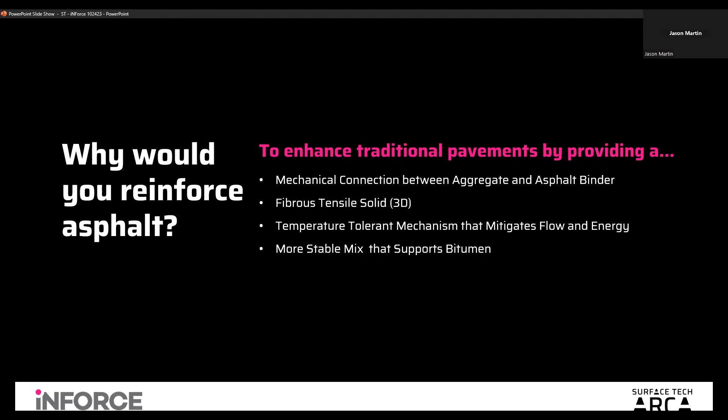Good morning, good afternoon in the US. I guess it's tomorrow where you all are at, which is kind of a cool thing. Every time we speak to folks in New Zealand and Australia, it's like looking forward in time, which is pretty cool.

So we're going to talk about ACE XP Aramid fiber solutions, but we're going to start off by looking at what typical pavements look like as they age and as they get beat up over time.

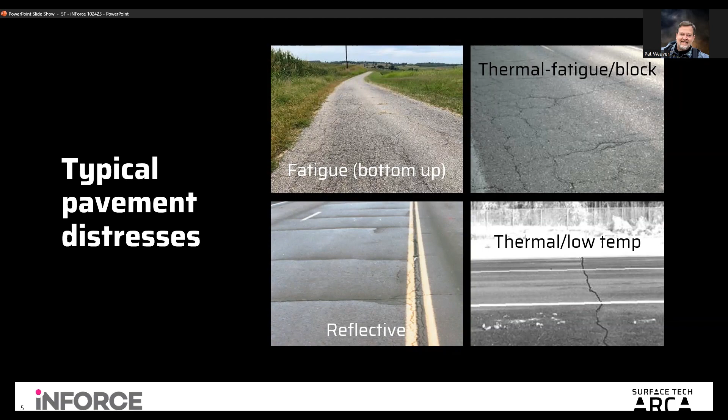I'm in the Phoenix, Arizona area, and those things tend to go hand in hand here, where once in a while it does rain and it does a tremendous amount of damage to the surface, which results in raveling and so on. So these are a lot of the different typical pavement distresses, and I trust they're similar to what you all experience in Australia and New Zealand.

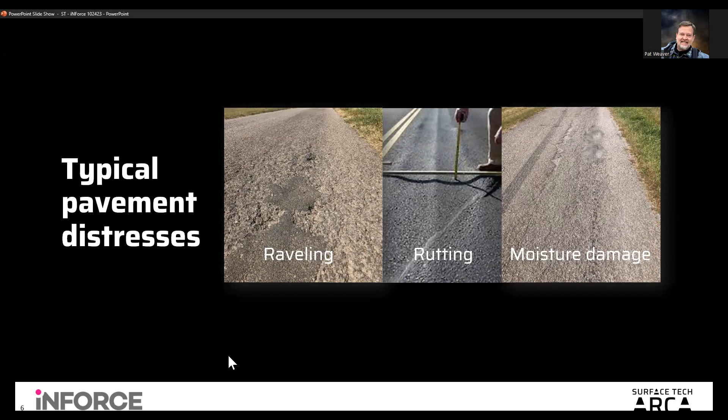Okay, so yeah, we all experience this all over the country. This is what happens with asphalt: asphalt ages, asphalt breaks apart, and asphalt falls apart. However, it doesn't have to deteriorate as readily or as quickly as we've seen in most of our lives. So what can we do to help with that? Well, first of all, we're going to talk a little bit about what makes up our product, and that's Aramid.

So what is Aramid? Aramid fibers, that's short for aromatic polyamide fibers. It's a class of high performance synthetic fibers known for amazing strength, exceptional heat resistance, lightweight properties, and many other aspects.

Aramid itself has a melting point over 425 degrees C. It's 5 times the strength of steel, which is quite amazing when we show you some pictures in a few slides of what our fiber looks like when you pull it apart and look at the individual strands. Each strand has a 400,000 psi tensile strength. Quite amazing product, high modulus.

Here's the big thing with Aramid fiber that's so different than other fibers. Most other materials you put in asphalt in fiber form will absorb asphalt cement. In fact, that's what cellulose fiber and mineral fiber are made for. Aramid fiber is not made for that. It does not absorb asphalt cement. It likes asphalt cement, we're going to show you a couple slides in a minute that'll show you that, but it loves the connection without absorbing.

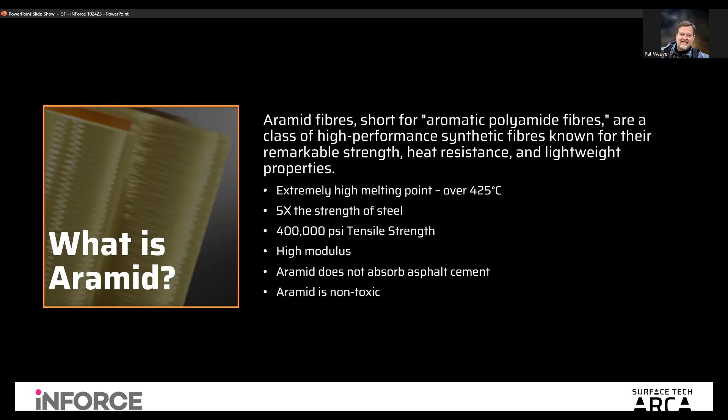So Aramid in use. In 1971, DuPont commercially started producing the first generation of Aramid fibers under the brand name Kevlar. Kevlar is a para-aramid fiber. I mean, the molecules are highly oriented along the fiber axis, which gives it outstanding strength and rigidity. We all know, have heard of Kevlar and what it's used for: body armor, aerospace components, ropes, protective gear.

Obviously, there's no issues with touching this fiber because we make clothing out of it. We make protective clothing out of it. We also make what used to be steel belted radial tires, or the material inside aerospace, airplane tires. It's all done with Aramid fiber now.

It's pretty amazing. Another application is a product called Nomex. It's a meta-aramid fiber, slightly different, excellent flame and heat resistance. So a lot of insulated gloves that you might wear for welding or handling super hot materials are made from Nomex, as well as the baghouse bags in every asphalt plant that uses baghouses on the planet, made from Nomex, which is a meta-aramid. Slightly different, but still an aramid fiber.

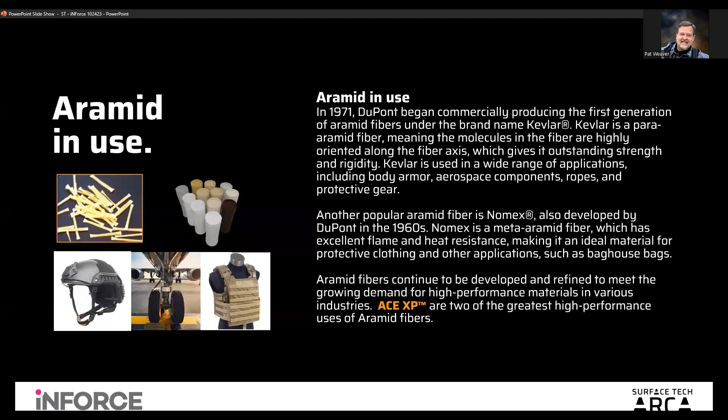And lastly, we continue to find different fantastic uses for aramid fiber, and we think we've found one of the best in our ACE XP. So how does it work? How do aramid fibers themselves work in asphalt? Well, the aramid fiber creates a three-dimensional reinforced composite material. We call that composite material ARCA, and I'll talk about that in just a minute. ARCA stands for Aramid Reinforced Composite Asphalt.

When you take the loose fiber and it gets mixed into the mix, under a magnifying glass or a microscope you can see what it looks like. Very much you can see the hair-like fibers with the little barbs on it. Well, those barbs love asphalt, and it allows it to root into the binder. Those fibers also love the surface of the aggregates. It bonds to the granules of the aggregate as well as the surface of the aggregate, and that's very, very important in the functionality of how this comes together. So combined, rock and sand or aggregate, bitumen, and aramid fibers create what we call ARCA.

George, do we want to pause here for a second for any questions? I see a couple on the Q&A or chat. Yep, good. That's good. Pat, we've got a good question here.

It's to do with RAP. So the question was asked, using product in upper layers, which may be recycled for RAP, does this put the RAP into the contaminated RAP category and hence unsuitable for reuse? That's a really, really good question, because many times when you use like a fabric material, and you mill that up into the RAP, it makes it very problematic to use. Our product doesn't. Our product loves to be reused over and over. It's such a fine product that as it goes through the milling cycle and the crushing cycle, you actually gain benefit in the RAP. So it does not ruin the RAP whatsoever. But that's a fantastic question.

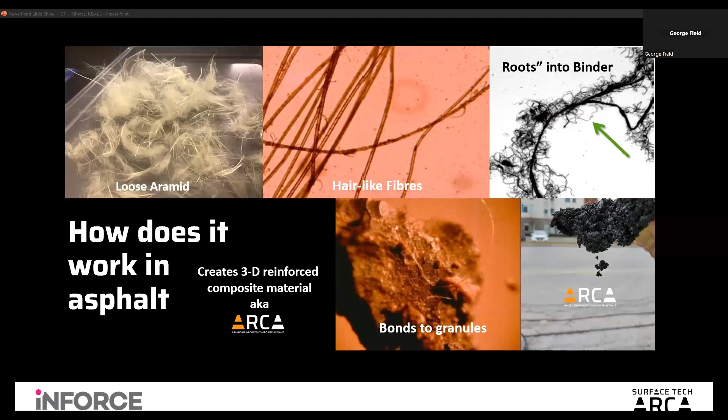So here's where the aramid meets the road, if you will. How does the aramid impact the asphalt mix? Number one, it extends pavement life. Well, that's an easy thing to say. That sounds like a sales pitch. Actually, it's not a sales pitch. It's the reality. We improve crack resistance in a tremendous way.

When you mitigate cracking, and then the fiber also slows down the crack propagation when cracking starts to occur, that is one of the biggest aspects of prolonging the life of an asphalt pavement material. We also improve the rut resistance. Now, here's the big deal with that. Typically speaking, when you improve crack resistance, you reduce rut resistance, and vice versa. When you improve rut resistance, you hurt your crack resistance. Well, our product does both. It helps crack resistance in a really big way.

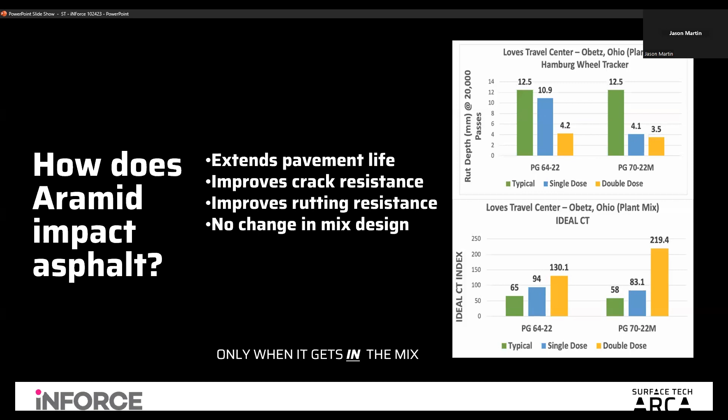So George, let me. Yep. Go, Steve. Let me put a handle on a couple of these very quickly and I'll jump into the slides so we can keep this moving, but I really appreciate the Q&A. And first I want to shout out to Peter Levitt. Good to see you, Peter, on the call. Long time haven't talked to you. It's really good to hear that your interest is still very much there with regard to the product line.

And Ryan Jantz has asked something along the lines of dosing questions and why only 2 doses. What we can share with you is that the dosing benefit, with regard to what we have found in the lab and in the field, is a linear benefit. Make no mistake about that. So as you add dosage to the mix, it only adds to performance. What is the restriction is economics.

So if you really want to get up into a very full depth, concrete-like structure, you can add more dosage. And at that point, economics is probably still a concern, but not as much. So there you can design appropriately with regard to it. But the 2-dose situation tends to be, in the world of what we deal with on most applications, a fair and acceptable economics. And George can get into that with you afterwards.

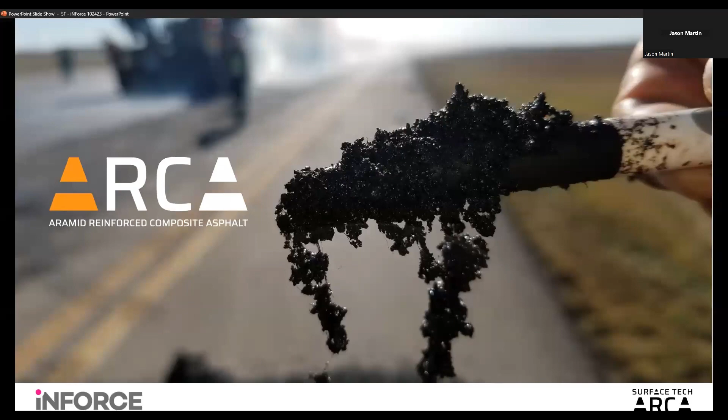This is something that we have really done a lot of work on, and we're very proud of that equipment that makes the plants comfortable, confident, and able to rely on the equipment to get it in the manner that it's supposed to be. And that is really an important aspect of all of this, because if plants aren't comfortable with what's going into their mix and can't validate what's going into their mix, things don't go into their mix. And we've done a good job of getting that confidence. Yeah, very much an everyday thing now.

I see Peter asked a question about polymer binder reduced performance over time. The thing I can share with you is that we have an ability to marry up to a neat binder with our product, and it can provide for PMA performance metrics. And that's a very big thing for those of you familiar with PMA, because it answers the question of availability, storage, ease of use at the plant, and most importantly, the carbon push-off you get with regard to using their product versus Aramid, which is a very low carbon introduced product.

Let's see, any of these, what is the end of life failure? I think we answered that question.

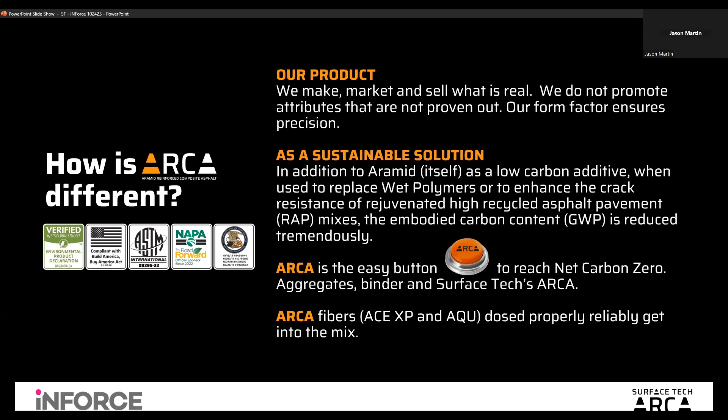I think at this stage of the game, we can go right into some of the case study look-sees, and I think that will keep us right on time here. Is that okay, Pat? You want to take it back over?

Sure. And basically what we're saying is ARCA really does stand for longer, it does create longer life pavements. When you use ARCA instead of a standard hot mix asphalt, you get longer life pavements. And it all starts with ACE XP. That's this product right here. That's what we've been talking about.

If you look at it, it is more than just a chemical modifier. We've already talked about how our product physically reinforces the pavement. We've talked about that a lot. It is the only performance mix modifier with published EPDs, and in order to do the EPDs, we in the US utilize the National Asphalt Pavement Association EPD tool, and it's the only one of its kind that's already pre-built into the tool.

So that's a picture of what the product looks like, these sticks. We can see it's made up. Each one of these sticks is about 10,000 fibers. Go ahead, next slide, George.

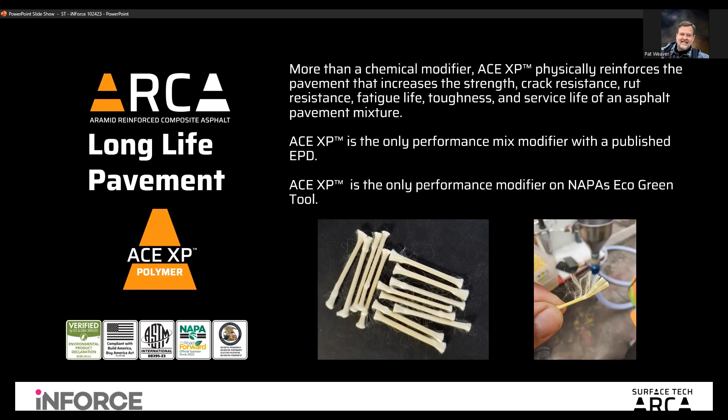So what is ACE XP? It's a blend of Aramid fiber plus Sasobit wax. The Sasobit wax holds the strands together in these little packets. That allows the Aramid fiber, which is extremely light, to not blow away in the wind or get sucked away in the plant air quality system. So again, like I said, 10 to 12,000 fibers per bundle.

The wax melts at a very low temperature, which allows, once it's in - and we're going to talk through this a lot in a few slides - but once it gets into the hot plant through the RAP collar, it goes from this fiber bundle into the individual strands. We've said this a lot: the wax is so minuscule, it does not do anything. Basically it's a 0.0001% addition to the liquid binder. And if anything, it would help, but it's so small an amount, it does nothing.

So because the mix designs don't change, the placement practices don't change, there's nothing you have to do to your mix designs. That's what we're bringing all together. That's what ACE XP is. Next slide.

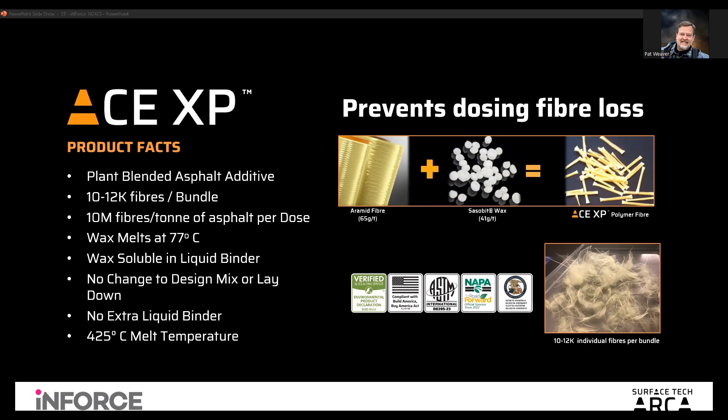So again, this kind of summarizes the form factor, which is very important. Some of the questions have already been asked, but no worries with stormwater runoff, no plastics. There's no plastic that is part of our componentry. There's no other fillers, we don't have to worry about that.

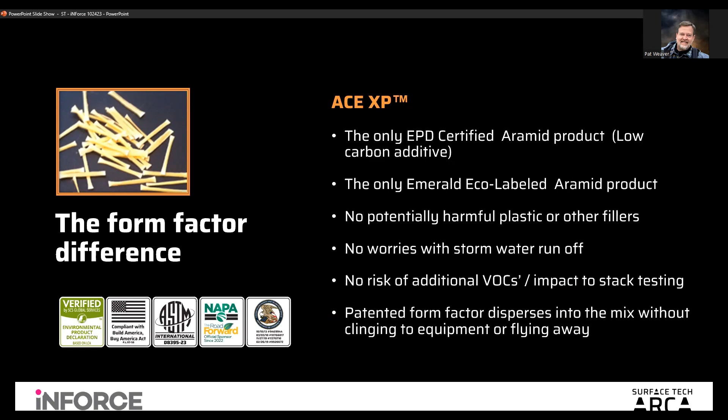Because there's no plastics, there's no other material that's problematic. There's no other fillers, there's no risk of additional VOCs that would impact stack testing. So when you run the product with your asphalt mixes with and without fiber, the VOC content does not change, because there's nothing that burns off.

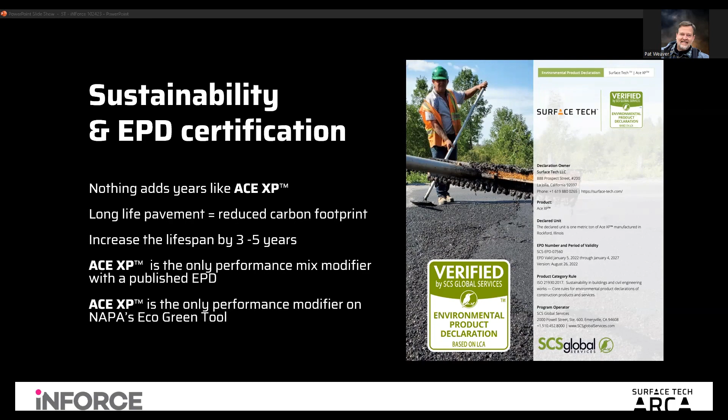Hey Phil, hold on a second. George, if you scroll to the ARMI interlayer slide, Phil can continue, since we have some pictures related to that question. There we go, Phil. That's my little demo I like to do on camera, folks.

By putting the fiber in there, with a double dose of fiber in the mixture, you'll never see it with the naked eye. You'd tear the mixture apart and put a spatula to it to see it in there. That type of mixture is naturally a softer asphalt, but even so, the mixture would typically break if you were to do that to it.

By putting the fiber in there, the fiber kicks in. We just got off talking to some folks an hour ago about a high strain environment in this very sense. And the interlayer is something I've worked very closely with since 1998.

I was actually on an airport project when the idea came, and I contacted Steve. I said, Steve, I want to put this on a project. Steve said, sure Phil, we can support you on this. We put it in there, and voila, it worked.

We began the lab testing to vet it, and sure enough, it worked just like the higher end polymers I'd been using, and even more so, adding three-dimensional reinforcement. That interlayer is actually a waterproofing interlayer, made to greatly reduce reflective cracking, better than anything I've ever used in my life. That's based on about 18 to 20 projects I've tracked across the U.S.

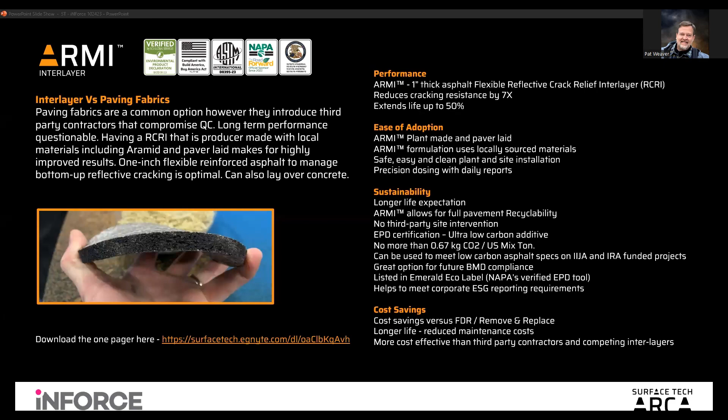Hey George, slide 32 identifies all those tests that Phil just talked about.

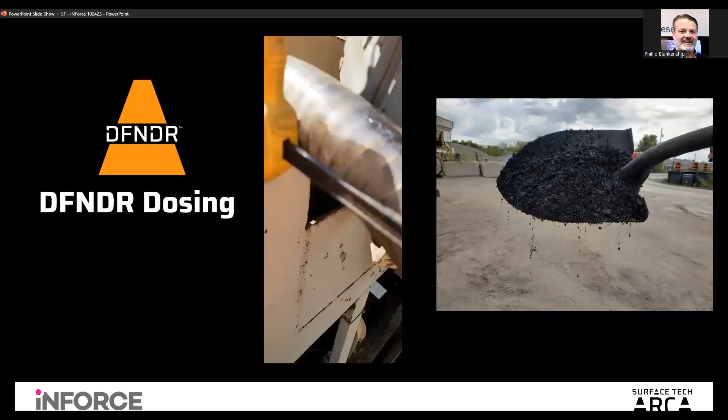Pat, I'm glad you got these memorized. You are a book, my friend. Or I have the book. Or you have the book. You got the playbook. Yeah, there we go.

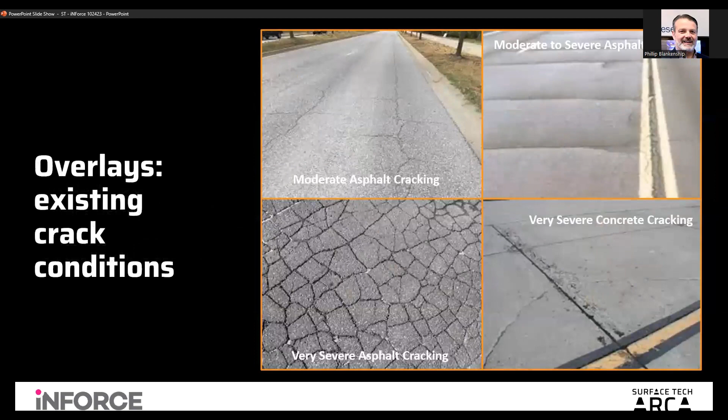So as Phil talked about, we have tested the daylights out of our mixtures with our product in it. And then the next slide, he said, well, who tested it besides Phil? Next slide will show you that.

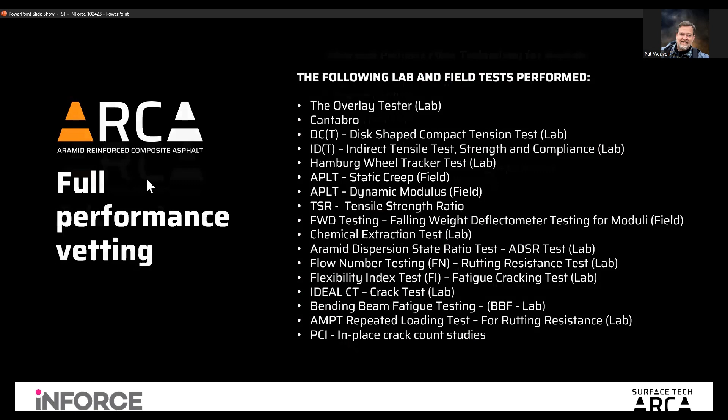And that's not all of them, that's all we could fit on this slide. I know we're missing some from this list, but we have a lot of folks that have been working with us over the last decade to make sure that

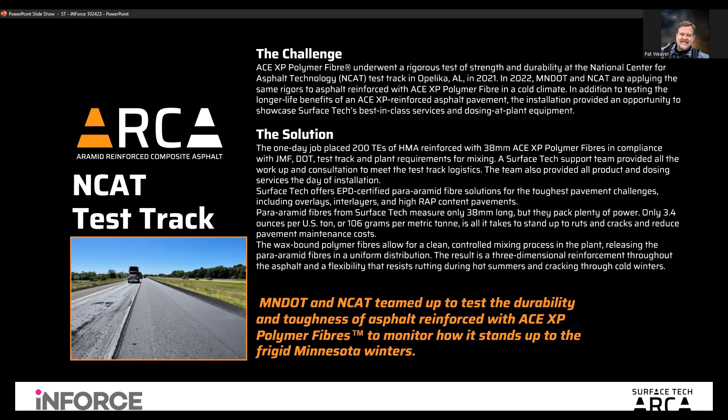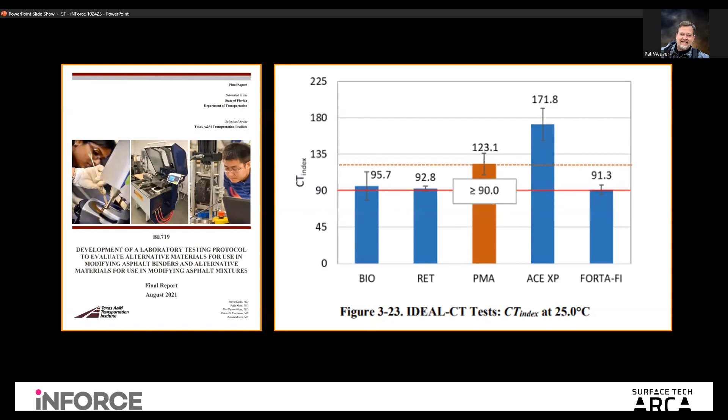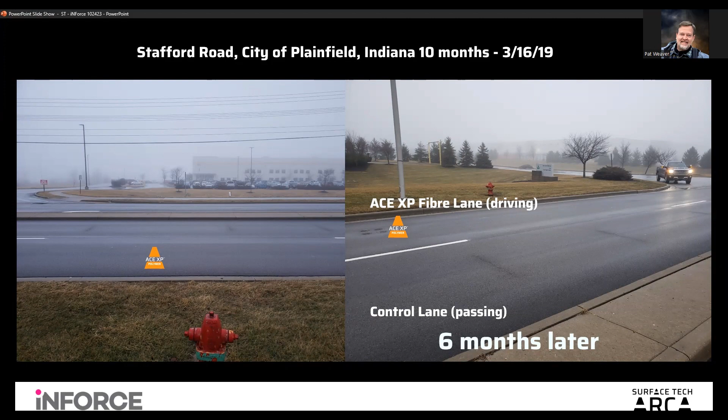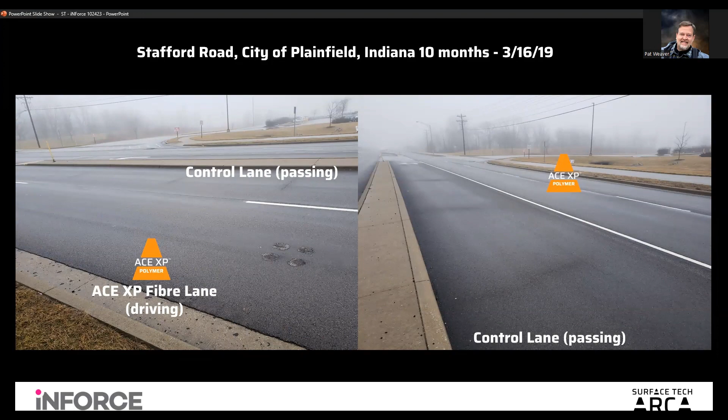This is what I'm talking about, the enhancement into a polymer mix. This is about a year later, starting to see the cracking reflect through even more. Next slide.

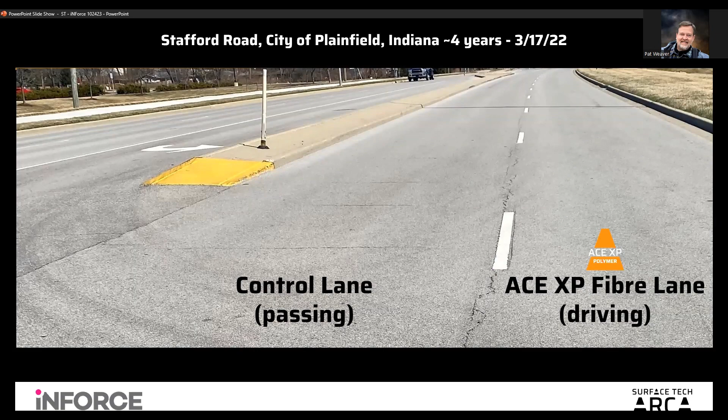This is cracks measured by Mr. Blankenship. In '22, 4 years in, you can see the cracks coming across. They hit our section and stop abruptly, and they don't pass through, which is a rarity.

So what happened - this is the lab testing right there from the field samples that George is showing. You can see the field samples themselves showed an increase in crack resistance anywhere from 44 to 111%. That's in a laboratory off of plant mix field samples during production.

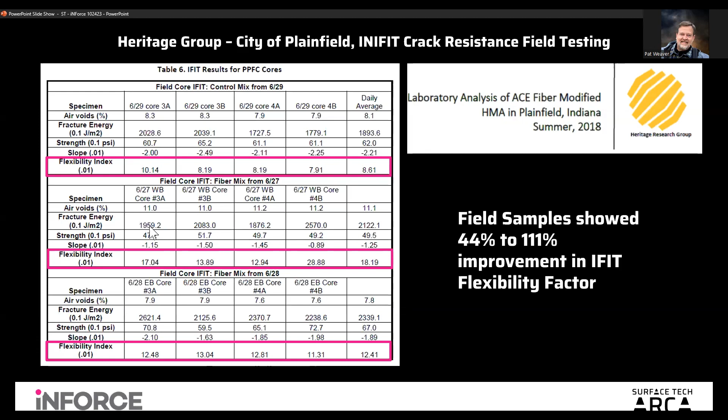This roadway is an airport access road just outside of Indianapolis Airport, not too far from the Indianapolis 500 that you may have heard about, where they do a little racing out there. And...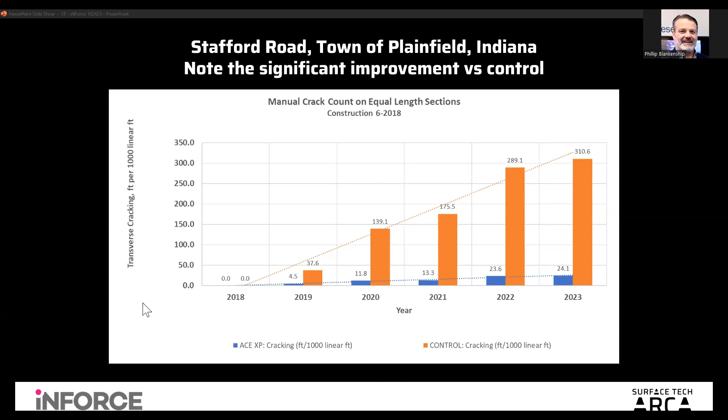I guess I will make a call out to rubber in that if you use rubber in open graded mixtures, it does a good job at noise dampening. Steve and Pat, I would love to make a claim that aramid fiber is noise dampening, but you're going to have to pay me to do that work.

Great, thanks. Phil, do you want to just quickly carry on with the lab side of things? Yeah. Bill, I will say this, that if you reduce cracking and rutting, your ride will be smoother, 100%. Yes. That's right. You will not hear the rattling inside of your car that you get when you run over potholes and distresses that you currently do. Hey, how about that? I'm all about that, Steve, and that's exactly right. Good analogy.

So Phil, there's your lab SOP. Yes. So when you're using this, and we've been, of course, working with the university on this very thing, you can't just go and add aramid fiber and just sprinkle it in and make it work. Again, it's not cellulose fiber. It does have to be properly dispersed in your mixture. The plant side in the field is easy. In the laboratory, you have to take a little bit more pain, and it's not bad.

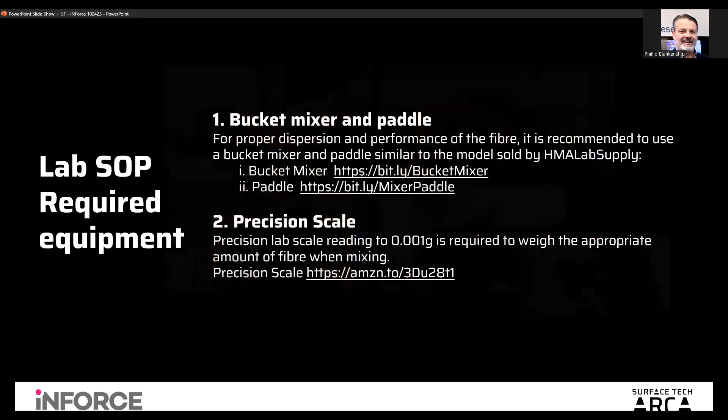It's just different where you layer it in, and we're using a bucket mixer and a paddle. You can't use a wire whip or it will gather on the wire whip. And you have to use a precision scale because most scales are only good to 1 decimal place. Notice here we're using 3, and that way we're getting it layered in. Yeah, you can go ahead to the next picture. We're going to divide the fiber up really well.

We would do that ahead of time, and then as it's delivered to you to put in the mixture, we'll layer it into that aggregate in about 3 different layers. And then once we get it all layered in, we'll make the cone, pour the bitumen in, and then we'll go through the normal mixing process. And through that, we're able to get very good lab dispersion, and then it's ready for testing.